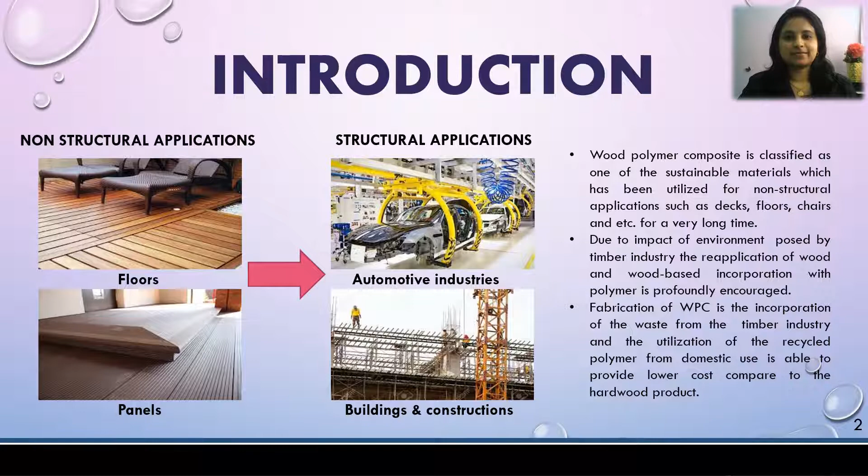Although the research and advancement in WPC are developing quickly, this material still requires particular considerations before being received by industries in structural applications, because the material's deformation mechanism under short-term and long-term mechanical loading is not continuously identical.

Besides that, natural fiber reinforced polymer composites are susceptible to failure, and their mechanical properties differ and break down rapidly in a moist environment compared to a dry environment. Hence, it is essential to study the hygroscopic properties of rubberwood fiber reinforced recycled polypropylene composite in a moist environment and understand their performance changes in static conditions.

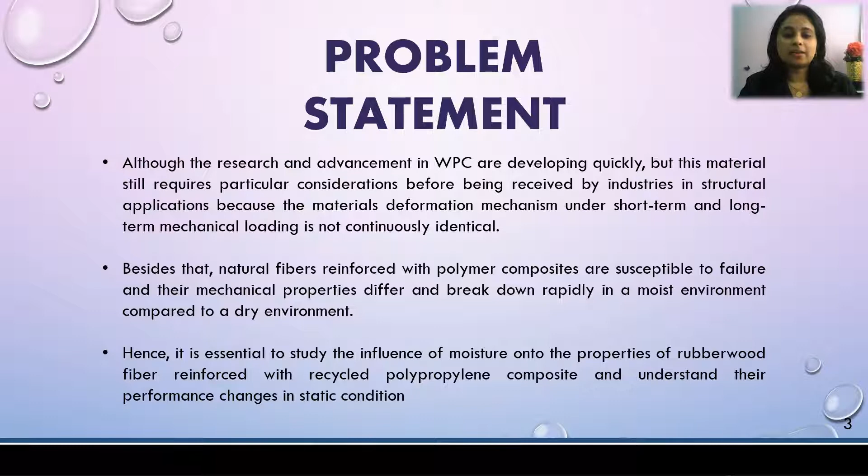The study focuses on the influence of moisture on the tensile properties of the rubberwood fiber reinforced recycled polypropylene composite. The composite is prepared using hot compression molding and consists of a fixed formulation that has been established in previous research. Hydrothermal aging is carried out using water immersion at room temperature for up to 30 days.

The composite was then evaluated in terms of changes in weight loss, rate of water absorption, and tensile properties such as tensile strength, tensile modulus, and strain at failure. Lastly, the failure probability of the composite is evaluated using Weibull statistical analysis.

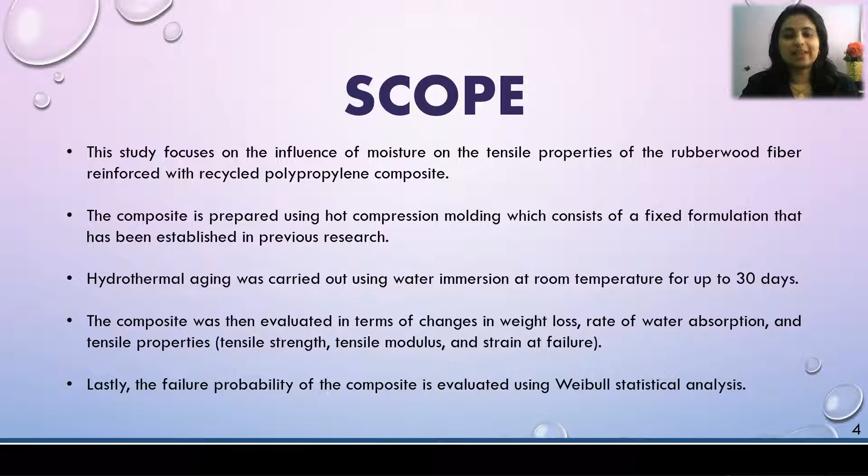The objectives of my project are, first, to evaluate the influence of water immersion on the tensile properties of rubberwood fiber reinforced recycled polypropylene composite, and second, to analyze the failure probability of the rubberwood fiber reinforced recycled polypropylene composite using Weibull statistical analysis.

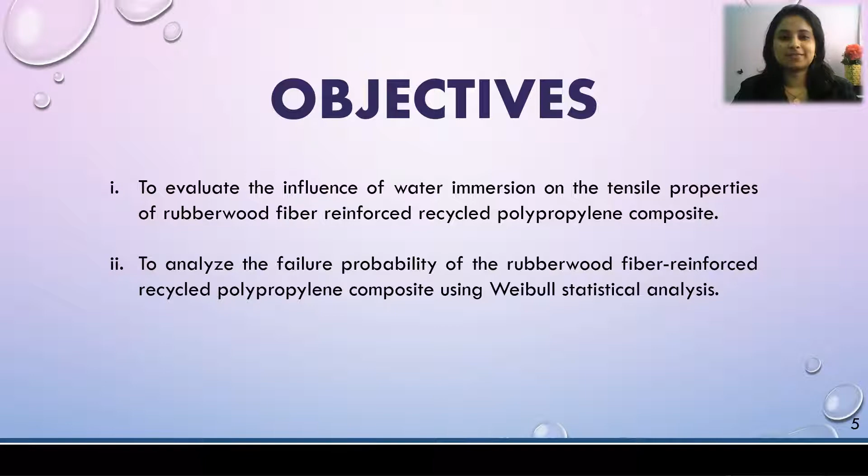The methodology of my project is as shown in the diagram in this slide. The WPC specimens were prepared using a manual hydraulic hot press with an open mold and then cut into the desired dimensions. Then, all the specimens were dried for 1 day at 60 degrees Celsius before the water immersion testing. Water immersion was carried out according to the ASTM standard as stated in this slide, in a water bath at room temperature.

The initial weight and thickness of the dried specimens were measured to a precision of 0.001 gram and 0.01 millimeter respectively before the immersion. For each measurement, the specimens were removed from the water bath, wiped with tissue paper until the water was gone, and immediately weighed. Lastly, the percentage of water absorption is calculated using equation 1: the final weight of the specimen minus the initial weight, divided by the initial weight, multiplied by 100%.

In addition, the water diffusion rate is also calculated using equation 2, where diffusivity equals pi times the square of the initial thickness times the slope, divided by 4 times the equilibrium water uptake.

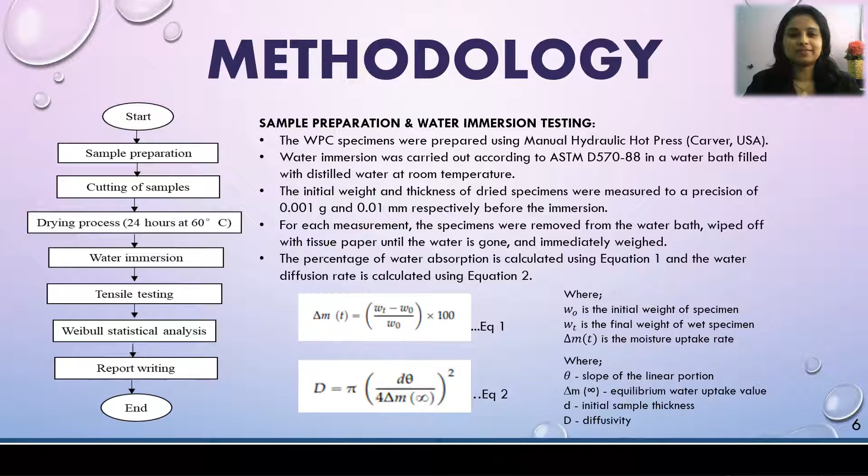Next up is the tensile test. The tensile test was performed according to the ASTM standard using a crosshead speed of 5 mm per minute. All tests were performed at room temperature. On a side note, all these tests were done in previous research, and the raw data was given to carry out the next step of my project, which is the Weibull statistical analysis.

Weibull distribution is being used to model the probability of failure of the composite when it is subjected to a certain load. In this test, two-parameter Weibull distribution was used to study the cumulative probability density function. The Weibull distribution is given as below.

Equation 3 shows the cumulative probability density function, also known as the cumulative failure probability, which is F equals 1 minus exponential of negative tensile strength divided by scale parameter to the power of shape parameter or Weibull modulus. This function is then further derived by taking the natural log on both sides, which results in equation 4, which is ln ln(1/(1 - F)) equals Weibull modulus times ln strength minus Weibull modulus times ln scale parameter.

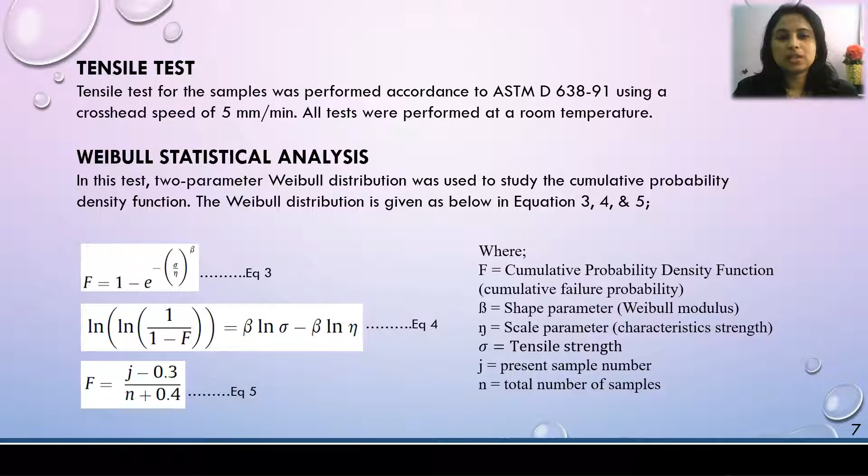The F value can be calculated by present sample number minus 0.3 divided by total number of samples plus 0.4, which is shown in equation 5. Next coming slides will be the results and discussion. The results will be analyzed on three bases, which are moisture uptake analysis, tensile properties analysis as in the tensile strength, tensile modulus, and strain at failure, and lastly Weibull statistical analysis.

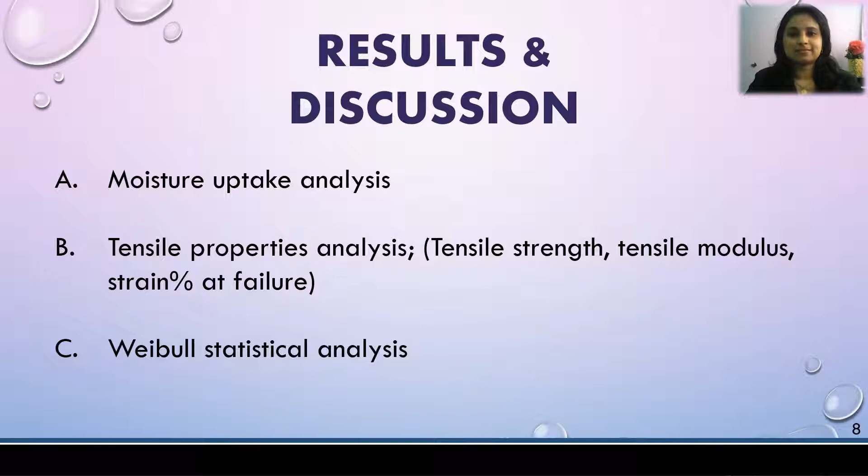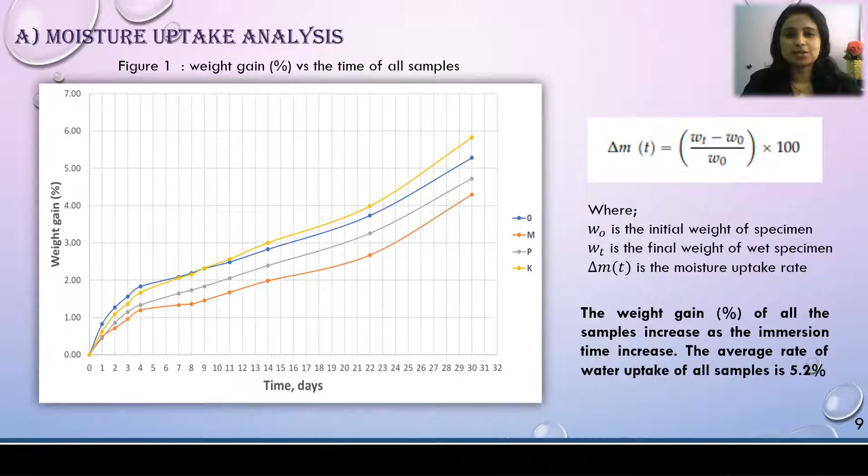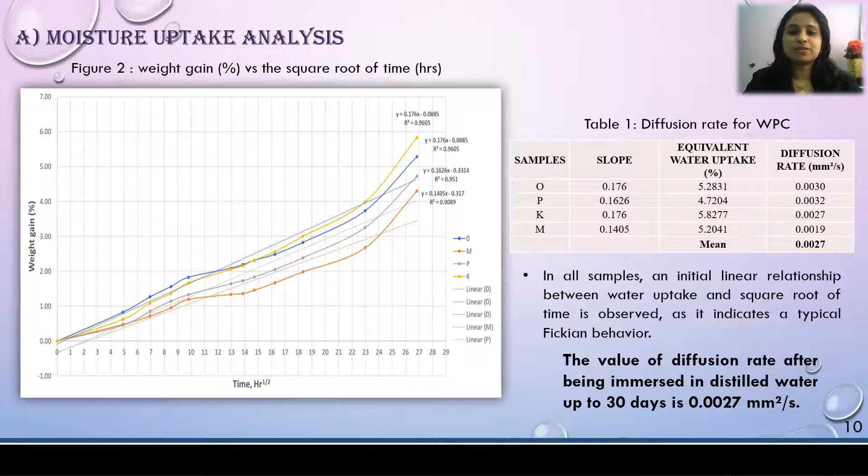The evaluation of the water absorption profiles as a function of square root of immersion time in hours is shown in this graph. In all samples, an initial linear relationship between water uptake and square root of time is observed, as it indicates a typical Fickian behavior. From this graph, the rate of diffusion is calculated using equation 2. Hence, it is found that the value of diffusion rate after being immersed in distilled water for up to 30 days is 0.0027 mm square per second.

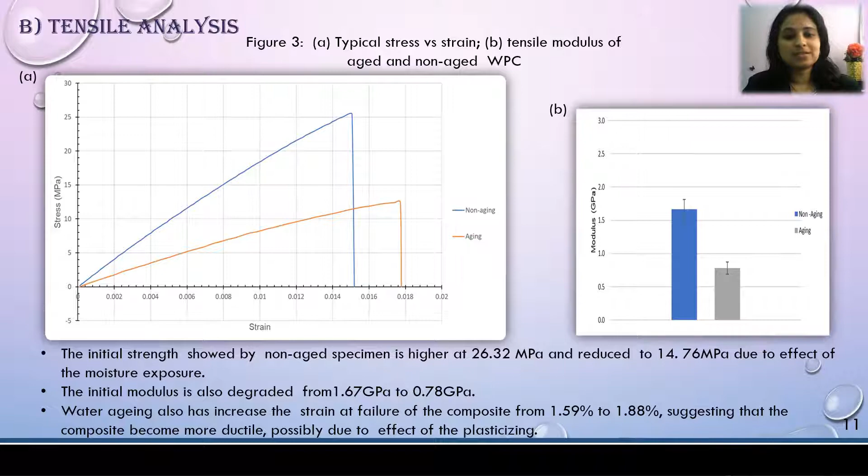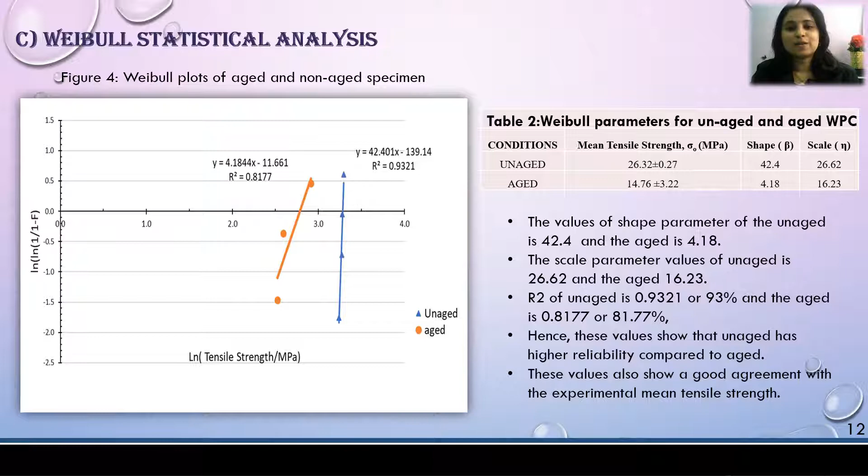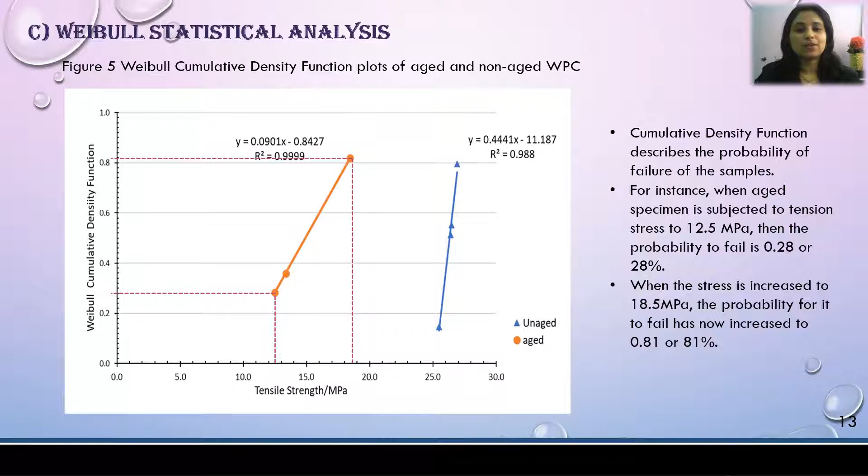In a nutshell, there are three conclusions that can be made from all this analysis. Firstly, the exposure of the composite to moisture has reduced the initial tensile strength from 26.32 megapascal to 14.76 megapascal and tensile modulus from 1.67 gigapascal to 0.78 gigapascal. This is probably due to the continuous water immersion that causes a degradation of the fiber matrix bond, and when it is subjected to a certain amount of load, it tends to fracture and break. Therefore, the non-aged specimen can withstand higher stress before it begins to fracture and break compared to the aged specimen.

Moreover, the strain at break has increased from 1.59% to 1.88% after moisture exposure, suggesting that the composite becomes more ductile, possibly due to the effect of the plasticizing of the wood fiber and PP matrix.

And finally, the Weibull modulus of the aged specimen is lower than the non-aged specimen, which is 4.18 for aged and 42.4 for non-aged. These values show a good agreement with the experimental results where the non-aged specimen has higher reliability compared to the aged specimen. Therefore, it can be concluded that Weibull statistical analysis allows us to eliminate further experiments to determine the probability of failure of WPC.